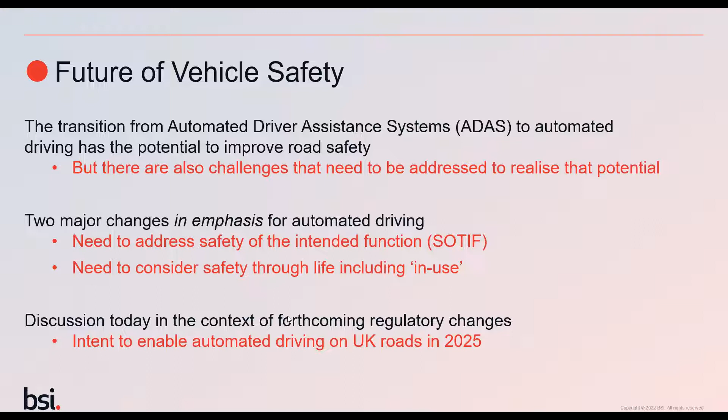It says here these are major changes in emphasis. These are not entirely new, of course, but actually the levels of autonomy we're talking about bring those really to the fore, and we can't ignore them. The discussion today is going to end up with a presentation about some of the potential legal changes around autonomous driving on the UK roads, and that's very much the background or the context for our discussion today.

We're here considering safety and standards. As already mentioned, there are challenges around assuring safety. Two specific ones are identifying how safe is safe enough. Is this as safe as a human driver, or are we going to introduce concepts such as ALARP and so on? And having chosen that, how do we go about measuring it?

Through ISO 26262 and through practices in other industries, it's become quite common to develop safety cases. If we're going to do that for an automated driving vehicle or a system, what is sufficient evidence? What's the right sort of evidence to have to support that safety case? These are difficult questions which don't have a very clear answer, although I hope we will shed some light on them today. But also, standards have an important role to play.

Standards are established by consensus, and they give us rules and guidelines and also characterize activities and the results of these activities that help us in addressing these challenges. And actually, by removing uncertainty in what's a complex area, it helps industry to work efficiently. It gives a way of having better interaction between industry and regulators. Industry know what's expected, and also regulators know what they can expect to receive from industry.

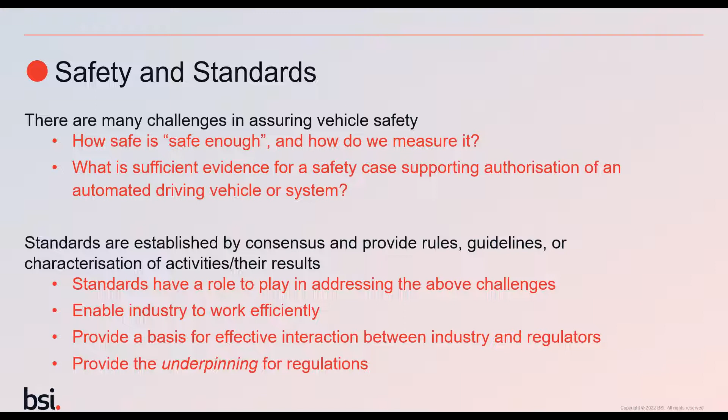So it's emphasizing the importance of standards, but you might say, hey, technology is developing rapidly, but standards normally evolve very slowly. I'm well aware of some, like 61508, that took more than a decade for the first edition to come out. So what do we do about that? Well, this is where some of the BSI activities, which I've been fortunate enough to chair the steering committee for the last few years, I think really come to the fore.

So the BSI has been doing work in this area, trying to be much more agile than is normally the case in developing specifications. So some good practice documentation, for example, publicly available specifications and flex standards being produced that can be drafted quickly and actually can evolve and change as the industry matures. These documents can then inform the wider standards community.

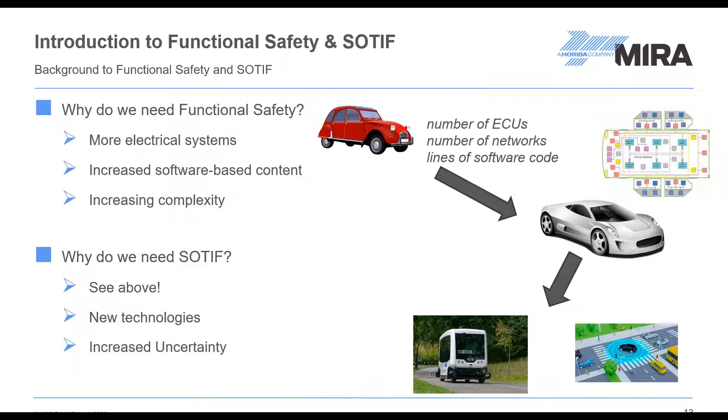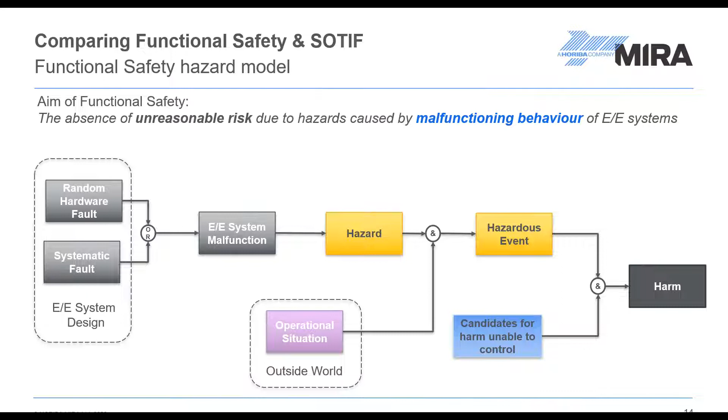So instead, we're looking at hazardous behavior that is caused by a triggering condition. And that is a condition that is present in the environment that the vehicle is operating in, and that the functionality is not able to or insufficiently able to handle. So a triggering condition stimulates a functional insufficiency in the system. And this might be both at system level or element level. So we're still using concepts that we've got in ISO 26262, although we don't use the word item in 21448. So we talk about vehicle, system level or element, which is more akin to the component level in 26262.

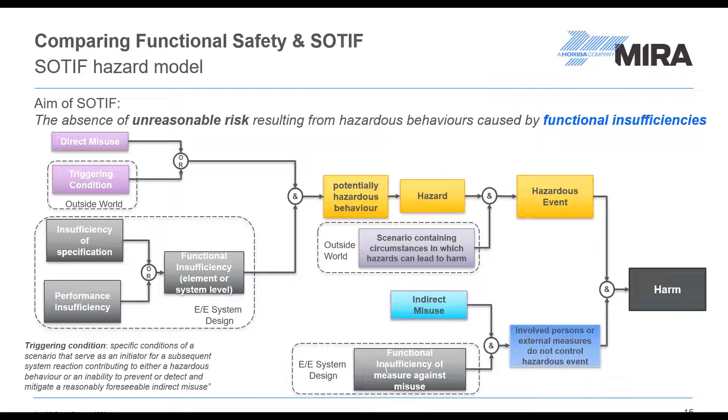But then secondly, because we also have to accept that no system or no design will ever be 100% free from faults across its lifetime, we also need to consider error control measures. That means ensuring the technical design solutions are capable of controlling faults when they occur. And together, these measures intend to result in a reduction of risk from an unacceptable level to an acceptable level. Which of the measures in ISO 26262 apply to a particular function is, of course, dependent on the ASIL that is determined during risk assessment.

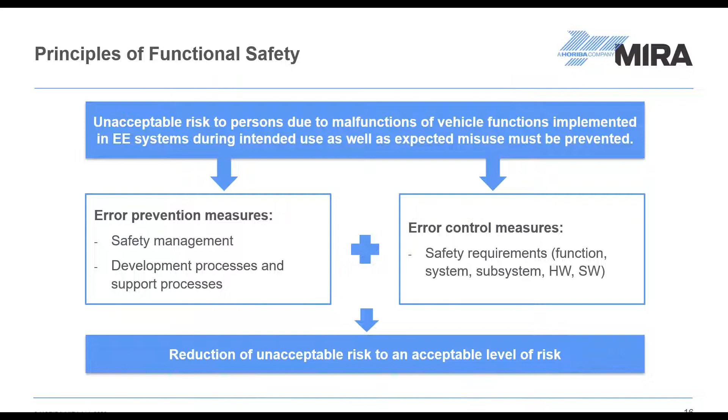Coming back to SOTIF, the overall aim of SOTIF is, of course, also to reduce risk, but the approach differs from what is set out in ISO 26262. So instead of safety requirements addressing faults, the overall aim in SOTIF is to identify sufficient triggering conditions, so the causes of the hazard, and address them by specifying SOTIF measures and setting criteria for acceptable risk of the intended functionality.

There is no concept of SOTIF requirements, so not like we've got in ISO 26262 with safety goals, functional and technical safety requirements. Basically, SOTIF measures means that the specification of the intended functionality is continuously modified and improved to align to its operational design domain and the conditions that are within the operational design domain. And so that's either done through changes to the specification of vehicle or system level functionality, or it could also mean improving the performance of an element.

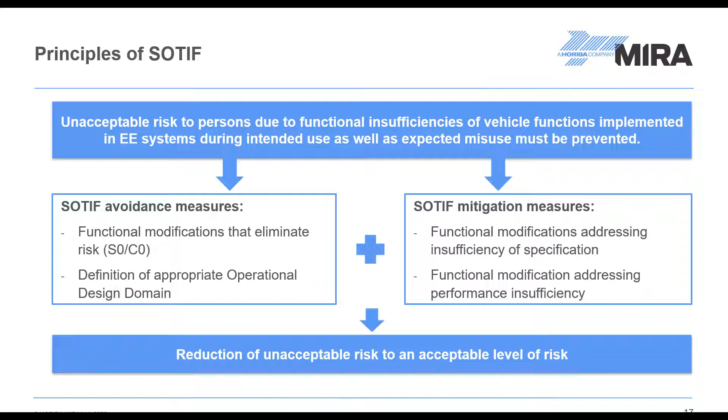Sorry, just having a drink to save my voice.

And a hazardous scenario obviously is a scenario that contains a triggering condition that causes hazardous behavior. So in an ideal case, if all the scenarios that a feature is going to encounter when it's operating are known, then the developers should be able to design the intended functionality accordingly to only exhibit safe behavior. But of course, there is a huge, if not infinite number of scenarios out there in the world, and we also know that the technology that we have in place at the moment isn't perfect.

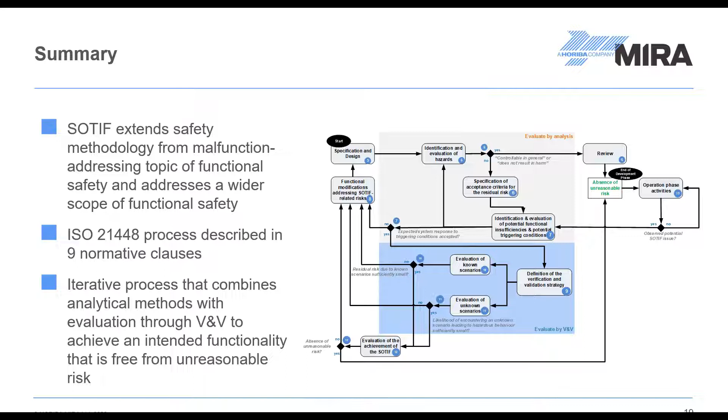Thanks very much, Edith. I think that's given us a good understanding of the principles underpinning SOTIF and ISO 21448. I'd now like to hand over to Prashant Dajati, who's a senior safety engineer at Wayve. He's more than 15 years of experience in function development, functional safety and SOTIF. And from 2018, he's led various SOTIF projects covering design, verification, and validation of driving automation systems from SAE Levels 0 to 4. He's currently contributing to the development of a safety assurance framework for an end-to-end ML-based autonomous driving system. And today he's going to tell us about Wayve's work implementing concepts from SOTIF and from other standards in their design work on self-driving vehicles. So Prashant, over to you.

Thank you, John. Hi, everyone. I'm Prashant. I work as Senior Safety Engineer at Wayve. And we are a London-based startup trying to develop an end-to-end machine learning-based L4 autonomous driving system. So today, I'll be presenting our approach to the SOTIF concept phase.

So let's talk about the agenda first. First, I will start by giving you an overview of the SOTIF concept phase so that you get a context of what I'm talking about in the consequent slides. Then I will explain how at Wayve we do the activities of hazard analysis, hazard identification, risk evaluation, and the methods we use to identify functional insufficiencies and SOTIF triggering conditions. And finally, I will also briefly touch upon our method for requirements generation. And the key takeaway from the presentation is how Wayve combines behavioral competencies analysis and STPA for the SOTIF concept phase. So let's crack on.

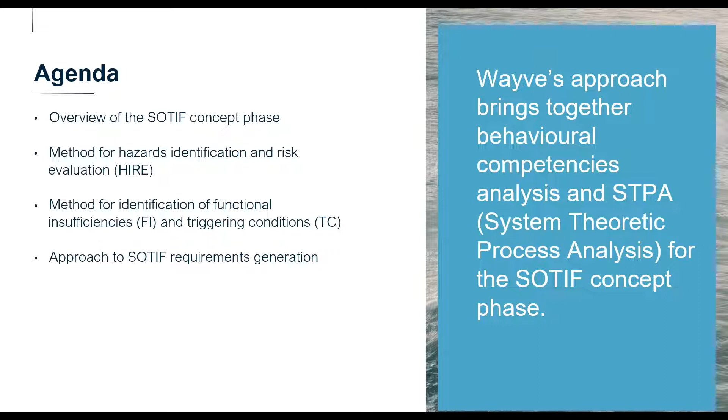So first, let's briefly talk about the SOTIF concept phase. So here you can see, first we start at clause 5, where we gather specification and design information to start our analysis. So here we gather information like the relevant operational design domain, the level of automation of the system, what kind of sensors we use, architecture, maps, etc. So this is the input for us to start with the activity of identification and evaluation of hazards.

So here, similar to functional safety, we are just concerned with identifying what hazards can result with the system without trying to investigate what would cause it. And this is important because maybe there are hundreds of different triggering conditions that can cause an unintended forward collision warning. But if we consider it as not safety relevant, then we don't want to waste our time trying to investigate that. So once we do the risk analysis and we decide that some of the hazards are not acceptable safety-wise, then we go into the consequent steps of defining the specification for acceptance criteria. This could be something of the sorts, how many incidents we would allow for X number of kilometers, these kind of targets based on the risk.

And then we start with the step of identifying and evaluating the potential functional insufficiencies. So functional insufficiencies are similar to malfunctions in 26262, but since there is nothing failing inside the system, the functional insufficiencies are either caused by insufficiency of specifications. This could be, as an example, maybe we forgot to consider some particular road signs. So that's why our system obviously will not react safely to them because it was not specified.

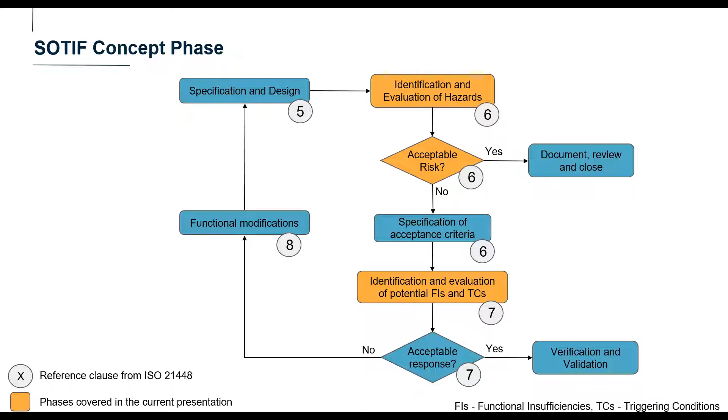So now let's talk about hazard analysis. So here, once we have the inputs from the system and design specifications, we do something similar to functional safety, where we apply methods like HAZOP and we evaluate to identify vehicle level hazards. So this could be things like unintended braking or excessive steering, etc. So once we have this, we go into the critical step of identifying hazardous events.

So this is where we deviate a little from functional safety, because in functional safety, what we are trying to do is identify the worst case scenarios, which gives us the highest ASIL. And since the origin of the malfunction is internal to the system, we are not really worried about all the possible operational scenarios. But for SOTIF, the unsafe behavior is triggered by an external condition outside the system.

That means even though my hazard is loss of braking, the cause for the loss of braking at a stop sign could be different from the cause of a loss of braking at an intersection. That's why we would like to have an elaborate list of all the possible hazardous events so that later we can analyze the root cause.

So for this, what we do is we consider something called behavior competencies. So these are basically a skill set or the capabilities an autonomous system should have in a particular ODD. And we combine them with vehicle level hazards and that gives us an elaborate list of hazardous events. As an example, it could look something like this. So we have considered our functions of braking or steering. Applying the usual HAZOP, we get these vehicle level hazards like loss of deceleration, excessive steering, etc.

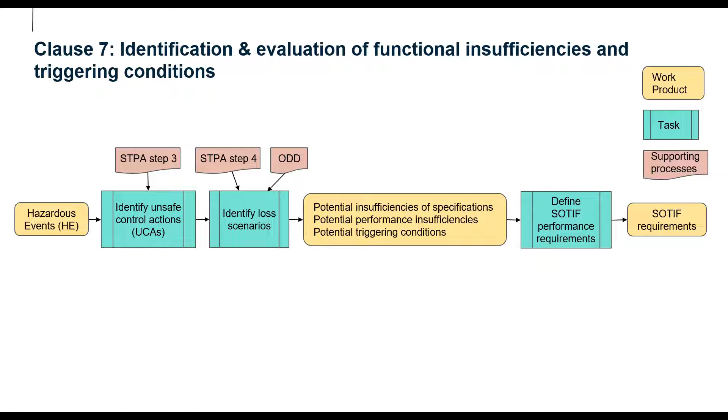And then from the performance requirements, we see if our system meets these requirements and decide if we need function modification or not. And I will show you how that works in the later slides. So let's look at some examples of unsafe control actions from step number 3. So this could look something like: the driving policy does not request braking while approaching a stop sign, or the trajectory controller accelerates towards traffic when stopped at a stop sign.

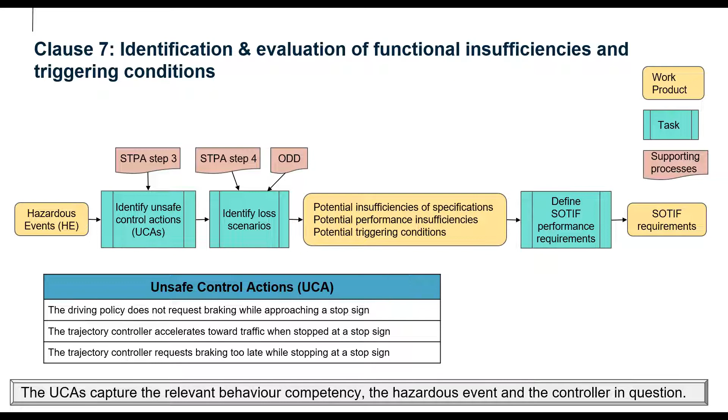So as you can see here, instead of talking at a vehicle level function, now we are talking about specific controllers that can result in this unsafe behavior. And what we are doing with this is we are capturing the relevant behavior competency we want to analyze, the hazardous event, and also the controller in question, because we also want to understand why a particular controller would behave in an unsafe way. Once we have the unsafe control actions, now comes the critical step of identifying the loss scenarios. So what we do here is we ask two main questions as recommended by the STPA method.

So first is, why would the controller not understand the context correctly? There are only two reasons why we would react unsafely to a particular operational scenario. Let's take the example of the stop sign again. One would be if the controller does not detect the context correctly, and the second would be even if it detects it, for some reason it wouldn't react to it correctly. So we ask these questions as recommended by STPA one by one, and explore the various elements of our operational design domain to see if there is any factor in the ODD that can cause this unsafe behavior.

For example, if we consider the controller receiving incorrect or corrupt feedback, we ask ourselves, is there any factor from the ODD which can result in this corrupted feedback so that the controller doesn't detect the context? If we are talking about the stop sign, we can right away look at things like low light condition or glare and say, if there is glare facing my camera, then it will obviously not detect the road sign. That means my system will not understand the context. So here what we have identified is a potential performance insufficiency. Even if it was specified that we want to detect the stop sign, because of the glare, we are unable to detect that. Another example could be low light conditions.

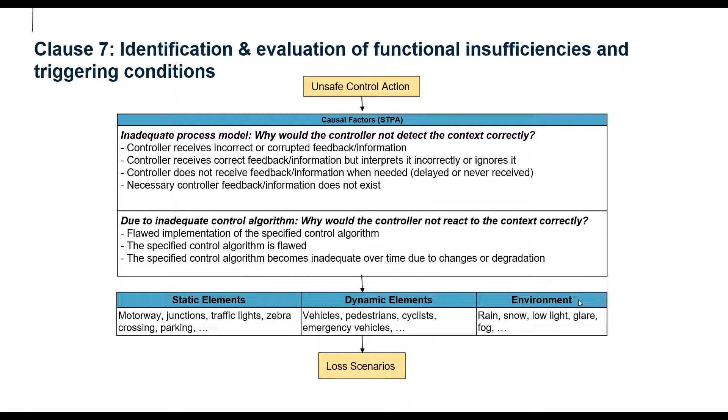So what we are basically trying to do is systematically ask ourselves the various questions of what can cause this loss scenario and compare it with various elements which are relevant to our ODD to see if any of these factors can cause this kind of unsafe behavior. So once we have these loss scenarios, it is easier for us to start identifying the functional insufficiencies and triggering conditions, etc. So let's look at an example for that.

Yeah. So if you look at this unsafe control action here, what it says is the driving policy does not request braking while approaching a stop sign. So from applying STPA, I could think of a causal factor saying the controller receives the incorrect feedback or the feedback is corrupted. And if you look at the ODD, one of the obvious examples that stands out is snow. So that means the stop sign was partially covered in snow, so my system couldn't detect it. So it was unaware that it was approaching a stop sign, and then it ignored the stop sign and we enter into a traffic which has reduced visibility.

So here, just exploring this causal factor question against various ODD parameters, we were able to identify a loss scenario. And from that, we can talk about what the functional insufficiency is. And in this case, it is a performance insufficiency, and that is the system cannot detect road signs covered in snow. And the potential triggering condition is quite obvious. It's the stop sign covered in snow.

So once we have identified a potential triggering condition, only then we start discussing the exposure rating. And it's always done based on frequency, because we can consider this as a pre-existing condition which is exposed when we come across a particular operational situation. So once we have this, we can think of writing a performance requirement. So finally, we have all the elements that we want.

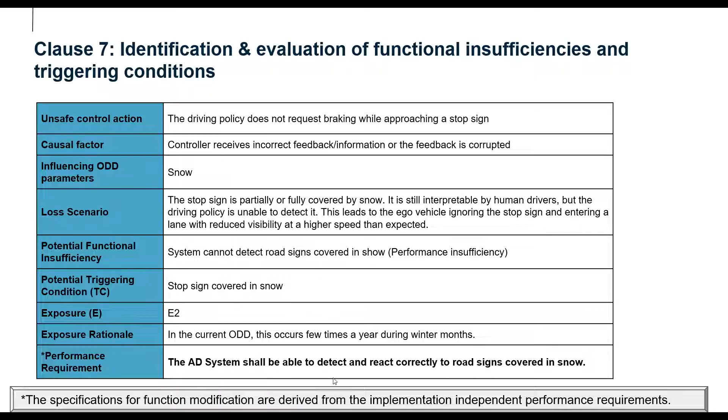So first, we write an implementation independent specification so that our design engineers and the test engineers can depend on this as a reference while they think about solutions or ways to test this system. So finally, to conclude, what we do here is we use behavior competencies and vehicle level hazards so that we can systematically identify an elaborate list of hazardous events.

And when we identify the hazardous events, we evaluate the risk and we give it different levels so that it helps us in better planning and prioritization. And finally, to identify the functional insufficiencies and triggering conditions, we use the STPA method, and with the help from the ODD, we are able to systematically identify the functional insufficiencies.

And the last point, first we generate implementation-independent performance requirements, and later we think about how to modify the function to meet this requirement safely.

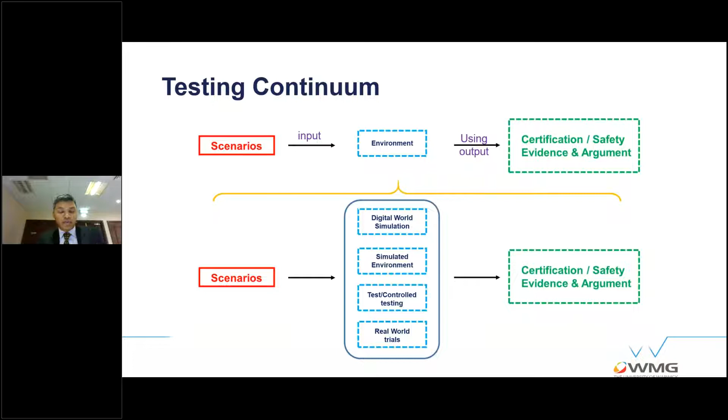And the environment could be a digital world environment, as in PC-based simulation. It could be a driving simulator. It could be a test track, or it could be the real world. It doesn't matter. What I'm trying to say here is you only need three things in terms of scenarios, test environment, and a way to make a safety argument.

When you take it to the next level down, when it comes to an engineering approach to trying to operationalize this concept of scenarios, environment, and safety argument, you need to somehow create the scenarios, the content of the scenarios. You'll need to format that in a particular language, and then you'll need to store that in a particular database so that you don't reinvent the wheel all the time. So that's the scenario piece.

Once you've got hundreds, if not thousands of scenarios, you'll need to plan where a particular scenario gets executed, either in simulation or in test track or in real world. And finally, you'll need to analyze each execution, if that was a pass or a fail, and then make a decision based on a number of scenarios, based on your coverage metrics and so on, to understand if your system is safe or not. So irrespective of the complexity of your automated driving system, you will always follow the same flow of create, format, store, plan, execute, analyze, and decide. It doesn't change. It will always remain the same.

Now, what we want to highlight here is that in order to operationalize this framework, and in order to do it in a scalable manner, we need to underpin this flow of create, format, store, plan, execute, analyze, and decide to an ODD and behavior competency-based approach. Prashant did a fantastic job of trying to illustrate how ODD and behavior competencies can be used as part of an STPA process. But what I'm trying to suggest here is take a step back further, because in order to create a scalable approach, you need the entire flow to be underpinned by ODD and behavior competencies. And that will enable you to reuse your processes, your tools, in order to create multiple different automated driving systems with different ODDs.

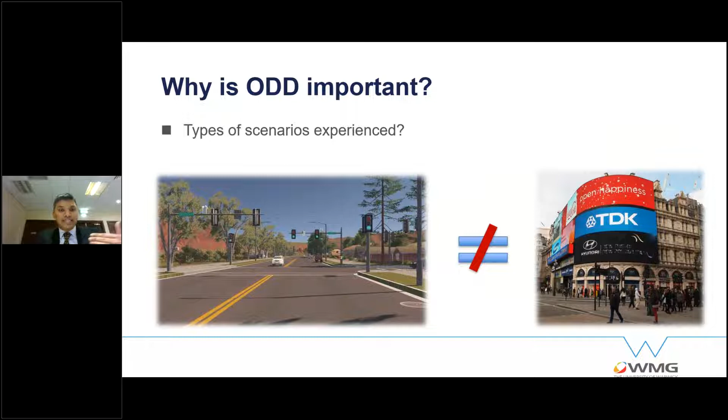So that's why the type of scenarios that you use is very important. And the type of scenarios needs to be a function of your automated driving system's operational design domain. So ODD stands for operational design domain. So for those of you who are very, very new to the concept of ODD, I put in front of you the definition of ODD. I don't want you to read the entire definition, just focus on the first two words.

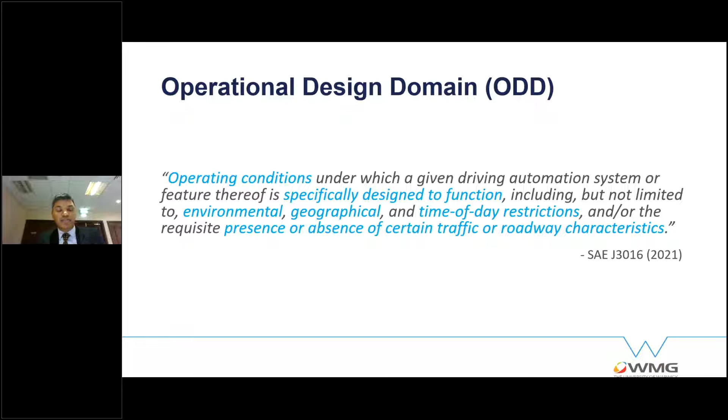ODD defines the operating conditions. So essentially it's trying to say, where is your automated driving system allowed to operate in? And it's a term that was introduced by SAE J3016 back in 2014, updated in '16, '18, and then most recently in 2021. So at a very top level, back in 2020, BSI had another standard, a PAS called 1883, which provided a taxonomy for automated driving systems.

At a very top level, it defines ODD at a scenery, environment, and dynamic elements level. Scenery, everything that is fixed. The environment, that is the weather and the connectivity side of things, and dynamic elements, things that move. So I'll highly recommend, for those of you who are not familiar with PAS 1883, go and have a read through it. It's freely available, and it's something that the whole assurance framework is underpinned by.

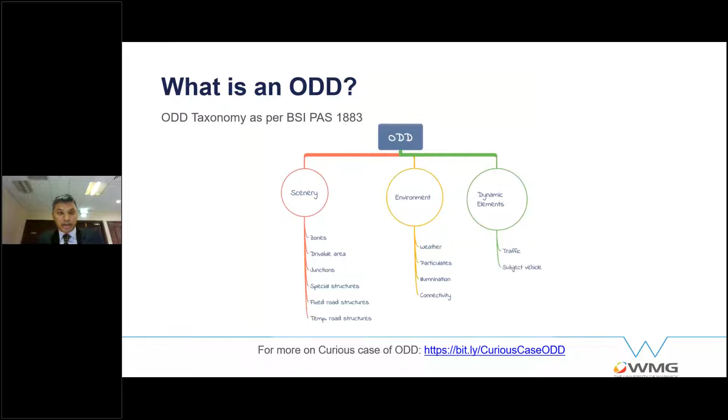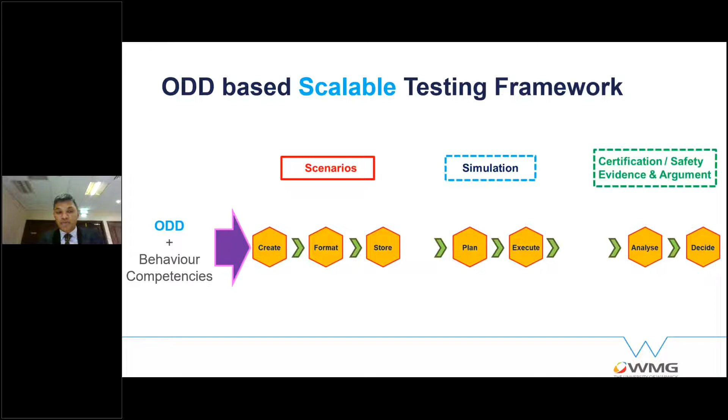So what is the role of Flex 1889 in this flow? So we've already highlighted that the flow needs to be a function of ODD and behavior competencies, but at the operational level, at a tangible level, what you're trying to create is the scenarios that you're going to execute in the different test environments. So what I'm going to do here is, because the focus is on Flex 1889, I'm going to only focus the discussion around the scenarios piece.

I'm only going to talk about the create, the format, and the store piece. If people are interested in the plan, execute, analyze, decide, happy to discuss that as part of Q&A or offline. So if you focus on the create, format, and store piece, the first thing you need to do in order to create scenarios is to understand what are the different methods of scenario creation.

At WMG, we've created 8 different methods of scenario generation, which at a very top level follow 2 philosophies. One is a data-based scenario generation. The other one is a knowledge-based scenario generation. A data-based scenario generation essentially looks at real-world data, like insurance records, accident databases, real-world trial logs, to understand what kind of factors actually lead to near misses or accidents.

However, you need to augment that by a knowledge-based scenario generation, because there's a big assumption in data-based scenario generation that automated driving systems will fail in a similar manner as human drivers, which is possible, but not something that we have evidence for. So we need to augment the data-based scenario generation with a knowledge-based scenario generation.

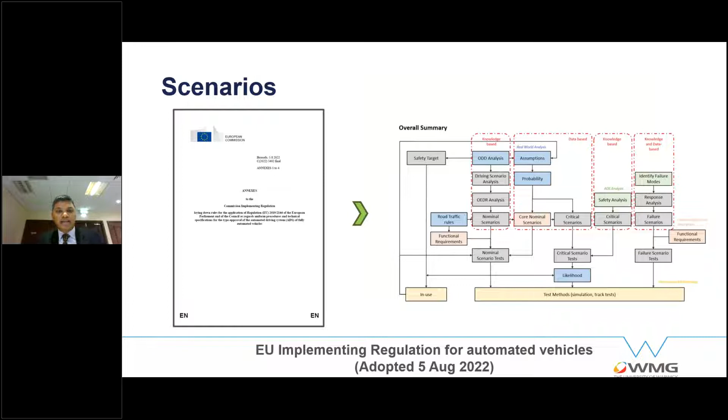So if you look into the EU regulation that was adopted for automated driving systems on 5th of August, you'll see a direct reference in the annex to knowledge-based and data-based scenario generation. Now, given that regulators have started to refer to scenario-based testing and knowledge-based and data-based generation, we need to start understanding what kind of standards we need in order to enable the operationalization of this philosophy. And that's where BSI Flex 1889 comes in.

So when we talk about formats, we're talking about formats from a regulatory, from a type approval, from non-coders' perspective. That's the stakeholder that we're trying to focus on in this presentation. There's a different suite of standards for other types of stakeholders, which we can discuss later on if there's time. So the whole concept of Flex 1889 was that there was a need for a natural language format for abstract or functional scenarios. While the title says abstract scenarios, it can absolutely be used for functional scenarios.

The end users of the standard are actually regulators, system engineers, but at a very top level, they are non-programmers, people who are not used to programming in C++ or Python or working with XML constructs, because most of the scenario definition languages or formats already prevalent in the industry are essentially things that you go and execute on a simulation platform. So they are either XMLs, Pythons or C++ files.

That's not something a regulator would be willing to write in. So you want something that is more human intuitive, more accessible to a regulator. That was the need we were trying to address. It's very important, and I'd like to highlight this again. Please do not focus on creating standards for the sake of creating standards. Identify a gap, and we identified a gap here where there's a need for a format that regulators, system engineers and non-programmers could use.

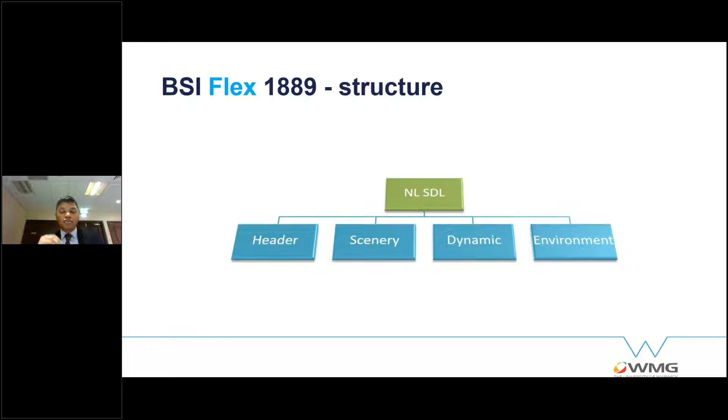So just to give you a very top level structure of what a scenario would look like in Flex 1889. At the very top, you'll have a header for the scenario definition, and then you'll have the ODD constructs of scenery, dynamic elements, and environment. I purposely wanted to highlight this because of the link it provides to the ODD-based safety assurance framework. Because you're providing your scenario definition also in terms of the ODD higher level attributes, it allows you to link scenarios to your ODD definition.

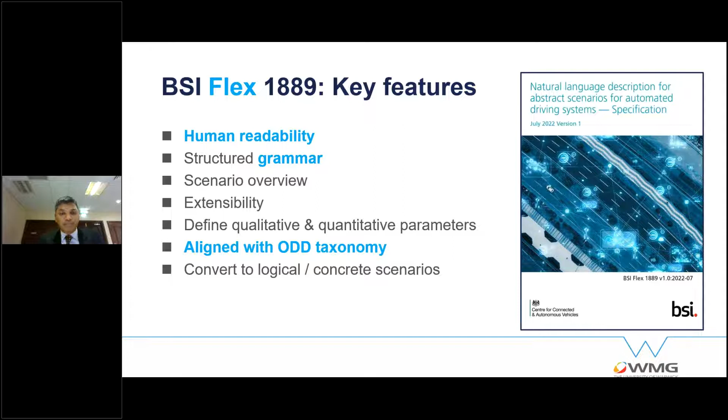So what are the key features of this language, and if you use it and define a scenario, what would you gain? You'll gain human readability. It has a structured grammar to it, so if you want tools and parsers, you can create them. It provides you an overview of the scenario. Like any good language, it has the capability of extending it further. You are able to define both quantitative as well as qualitative parameters for scenario attributes. It's aligned with the ODD taxonomy, which is key to enabling the ODD-based safety assurance framework. And for people who want to use it for even logical and concrete scenarios, you can. But the main purpose of this language is for abstract and functional scenarios.

And once you've formatted all these scenarios in Flex 1889, after you've created them using data and knowledge-based scenario generation methods, then you want to store them in a particular database, such that it enables you to operationalize the ODD-based safety assurance framework. So for that, we've created Safety Pool Scenario Database, which is the world's largest public scenario database, roughly around 250,000 scenarios. But the key aspect, and the reason I wanted to share this with you, is everything in Safety Pool, like in the Flex 1889 and the scenario generation, is underpinned by ODD and behavior competency definition.

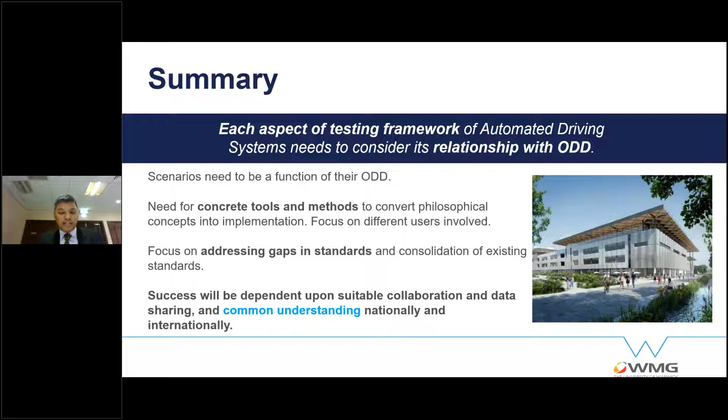And my appeal to the ecosystem, especially the people who are on the call, and given this is a BSI webinar, is let's address gaps in standards. Let's not create competing standards just for the sake of another document out there. There are enough gaps out there in this ecosystem that need to be filled.

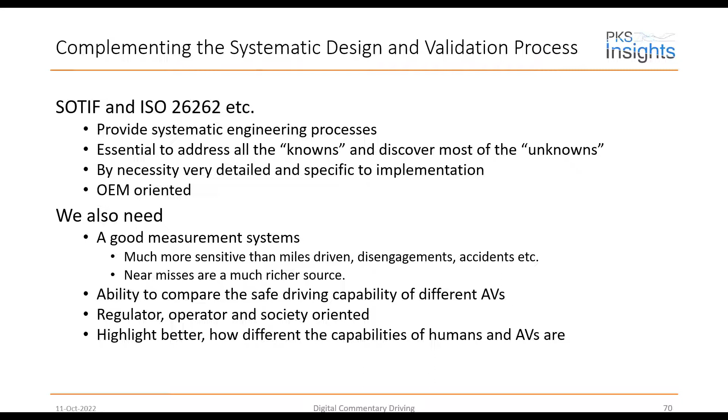So BSI, it must have been a year ago or so, asked a group of us, Nick Reed and Siddhartha, to look into what would be a set of KPIs that would actually say one AV stack is as good as another. And we struggled actually to find any sensible benchmarks to judge, because the environment of driving is so complex, and because there are very few truths that are really out there.

So we really thought about this and talked to lots of people. And there's a report there, but what we realized is it's very difficult to find truths in the real world, because you don't know when something takes a particular action whether that was the best thing or not, because you don't know what was around it. And you can do some tough testing at test tracks, but in the real world it's very complex, and so we don't know.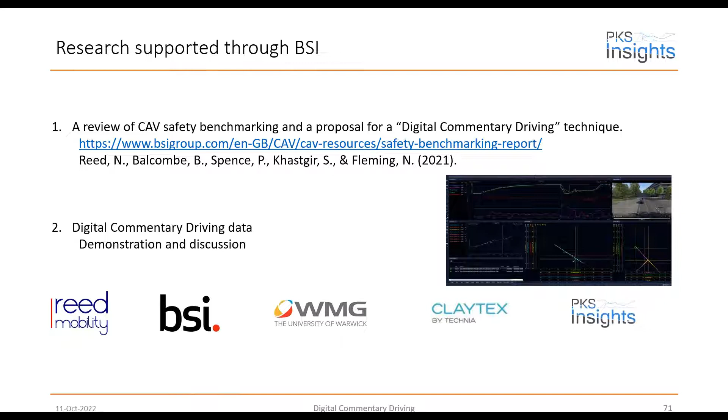Well, it comes from the concept that in an advanced driving test, one of the things that the examiner will do is ask the candidate to give a running commentary of what they can see, what they think will happen, and what the risks are. And that way you can assess whether that candidate is aware of all the things that are going on, and it's a very good way of understanding that person.

Now, clearly, in that situation, you've got one human judging another, and that's a closed system, and that works. But there's a limitation as to how much a person could say.

They can obviously prioritize certain things. But in an AV stack, in a computational way, we can make some of that information much faster. Now, what we're trying to do is give an explanation at a really high level of what can be perceived and what can be seen, and predicting what's going to happen in the next few seconds. So it is outcome based. It's not about how you got to that conclusion. It's not about understanding the raw data.

You cannot make a super AV that measures a candidate AV. So it is about using high level data that, as I say, is independent of the raw data and independent of the IP and the implementation. And then you can use that data to come up with new KPIs that actually give you the real things that you need to understand as to what is safe and what is not safe, and for that to evolve, because as we make progress, we'll find more and more cases of how we judge whether something is safe or not. It's important that any measurement system is both valid in simulation and real world.

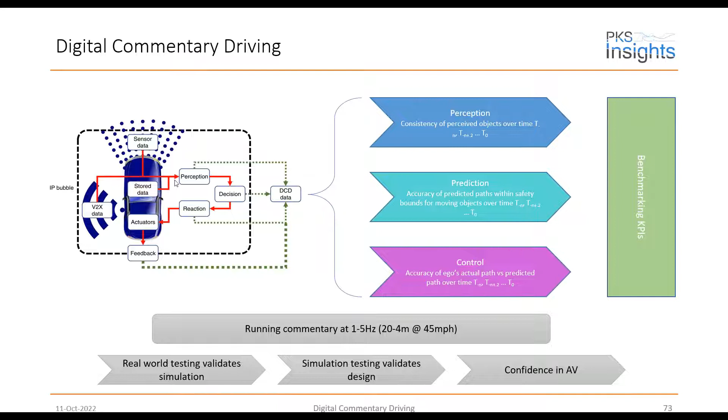And just a bit more about what it might actually mean. So there's the UN ECE has stated that there must be in-service monitoring as one of the pillars to making autonomous vehicles safe, alongside the simulation and the track testing and all the auditing that covers whether you followed SOTIF and whatever standards. But there has to be some sort of in-service monitoring that actually gives us feedback about what's going on, and so this, in a way, is directed at that.

So what it might mean is that there's a listener in the vehicle, and it basically just monitors what's going on, and if there's something abnormal, which obviously is not expected to be very common, but if there is something abnormal, then it can raise an event, collect a bit of data, all from this sort of prediction stuff, and then that can be looked at in more detail in a cloud environment.

Now, it's very likely that you would get false positives on the vehicle because it doesn't have the full context, and then those false positives could be ironed out in a cloud environment. But it could be lightweight enough that you would actually not need to send out very much data at all.

So now, what is the sort of target market of DCD? Well, it's really the consumers of one form or another. So regulators need the ability to understand what the vehicle is doing now, and those regulators have to have... One of the things that people don't fully grasp is how good they are at understanding images. And we often use the phrase that a picture's worth 1,000 words, where for an AV or a computer of any type, 1,000 words is much more useful than a picture.

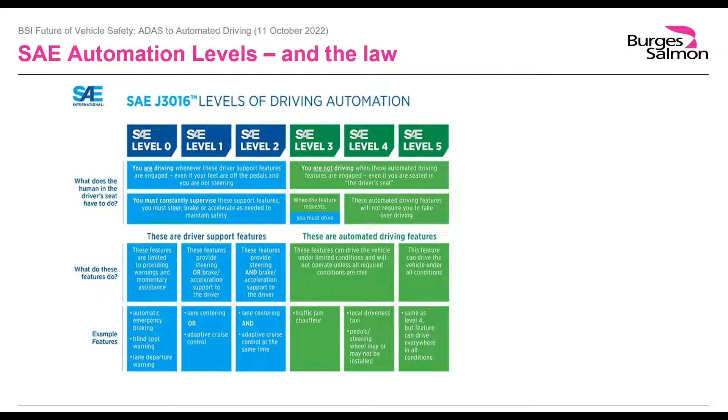And in respect of those regulatory focus points, I thought I might just illustrate a bit about why the key issues have been from a lawyer's point of view. I expect most people on this call are going to be familiar with the SAE Levels of Automation, first published by the SAE in 2014, and really it's been perplexing lawyers ever since. And I just wanted to explain a little bit why it's been that difficult.

I guess first of all, levels of driving automation, that's a really legally difficult concept. So far as the law is concerned, you either are automated or you aren't automated, and that especially applies when you look at levels 0, 1 to 2, which talk about increasing amounts of assistance, but from a legal point of view, it is basically just driving as it's always been, with an increasing amount of assistance, but a human driver is still the human driver.

For levels 4 and 5, this is certainly automated driving when active. The human driver is not needed when engaged, as the vehicle is able to safely drive itself. And this is the core definition of what an automated vehicle is under the Automated and Electric Vehicles Act. Level 5, of course, being that drive itself anywhere, anytime. But level 4 being self-drive, but only under limited conditions or ODDs, and only when those conditions are met.

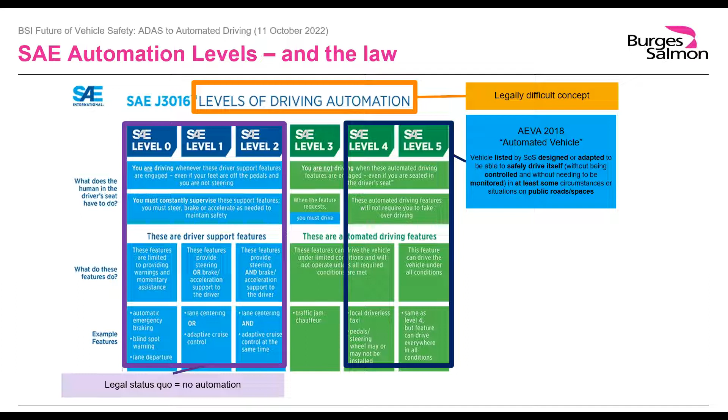Level 3 is much more complicated, and it's what the Law Commission called the Mushy Middle. And from a lawyer's point of view, it's a bit of a minefield. So within level 3, you still have, like level 4, the ability of the vehicle to drive itself under certain limited conditions when conditions are met. But unlike level 4, when the feature requests, the human driver must drive. So the human in the loop is an essential part of the design of level 3.

And this means that there is, frankly, a need for takeover. And this takeover has understandably raised a great number of questions for lawyers ever since CAVs first started being trialed in 2014 and before, actually. But in general, the relationship between humans and machine in levels 3 and 4, where either may undertake part of the driving task, is conceptually quite novel to the law, and it challenges a centuries-old body of law that's only ever really seen driving as a human task and judged driving against human capabilities, limitations, and errors.